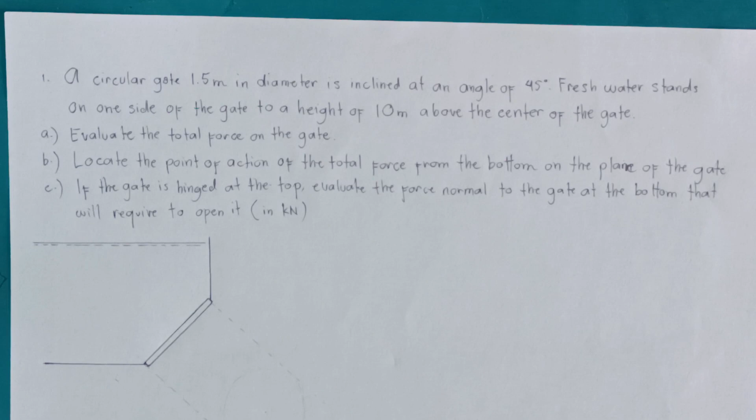Our topic now is about hydraulics, focusing on hydrostatic forces. The sample problem: a circular gate 1.5 meters in diameter is inclined at an angle of 45 degrees. Fresh water stands on one side of the gate to a height of 10 meters above the center of the gate. Letter A, evaluate the total force on the gate. B, locate the point of action of the total force from the bottom of the gate on the plane of the gate. C, if the gate is hinged at the top, evaluate the force normal to the gate at the bottom that will be required to open it.

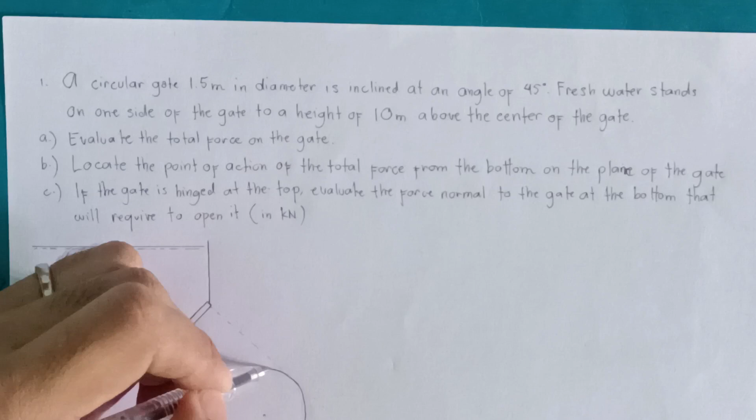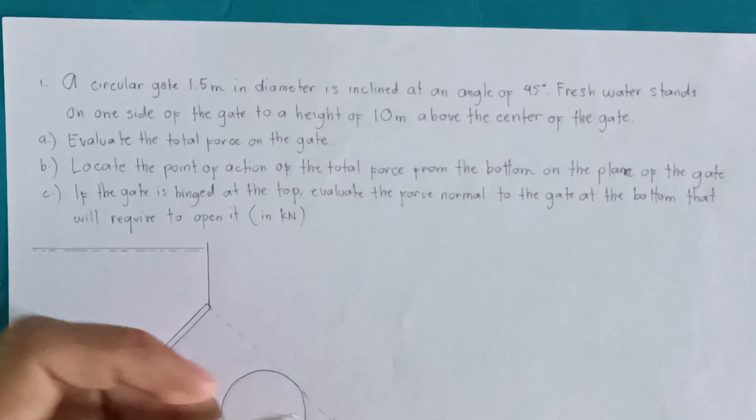It's 1.5 meters. Then it's given that this is the 45 degree angle. Fresh water stands on one side of the gate to a height of 10 meters above the center of the gate. So the center of the gate is here.

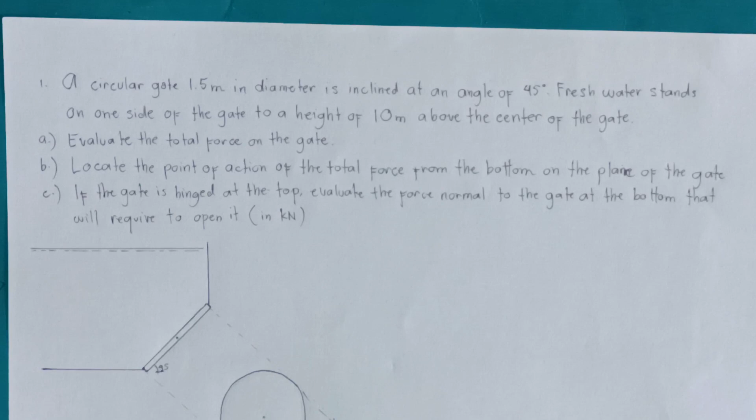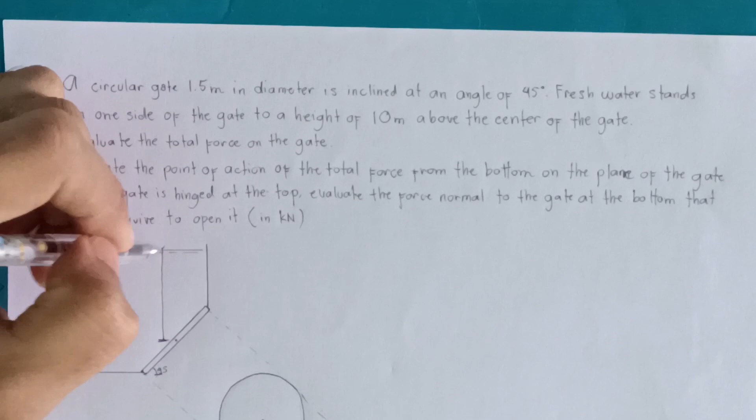Fresh water stands on one side of the gate to a height, meaning from the center to the liquid surface. So this is it, which is 10 meters. This is our 10 meters, our H bar. So that's all the given information.

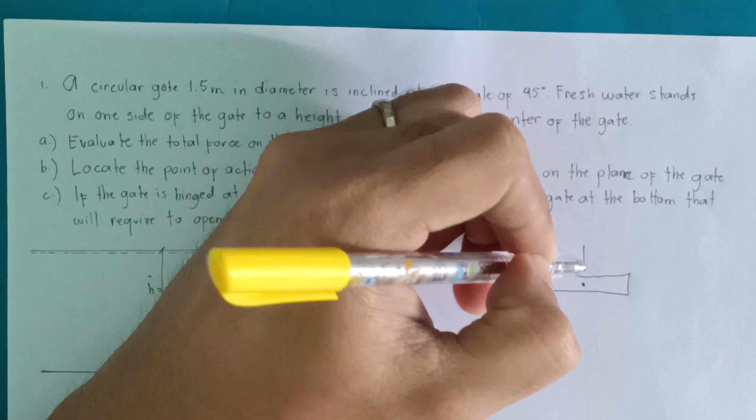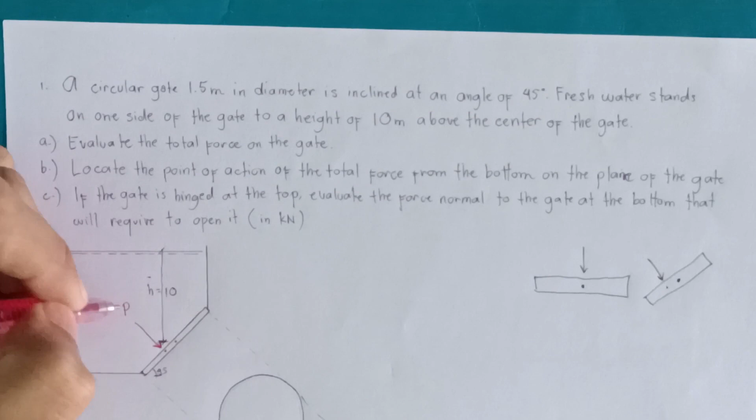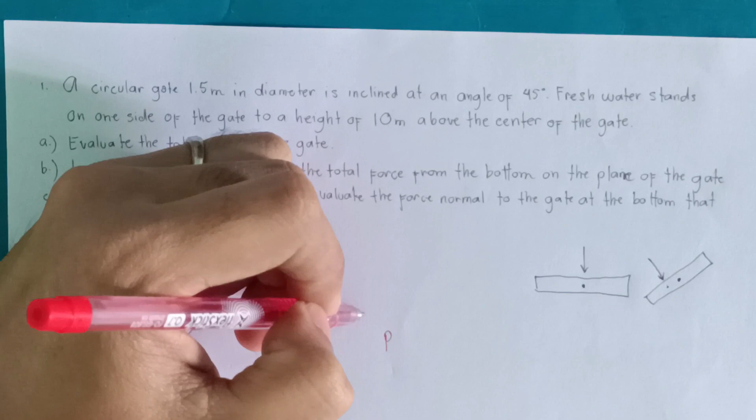Then what's our formula? Total force, what is that? P, our equation number 1, is equals to gamma times H bar times area.

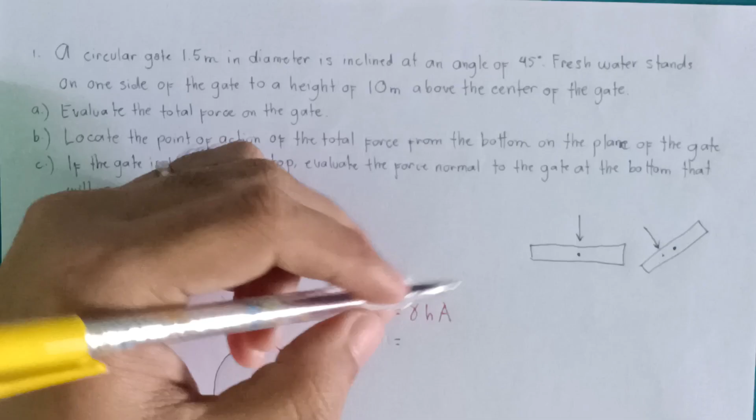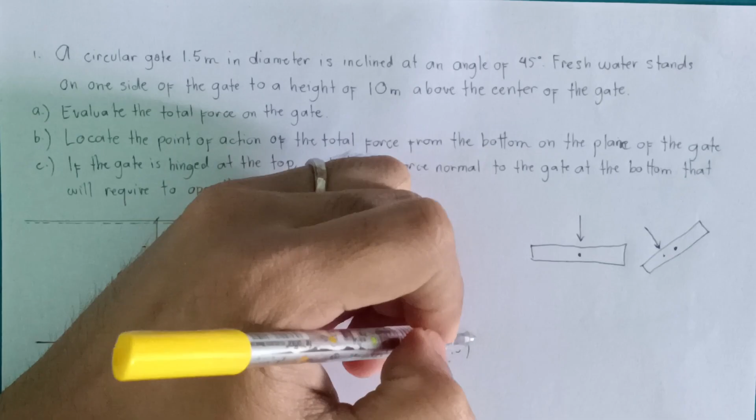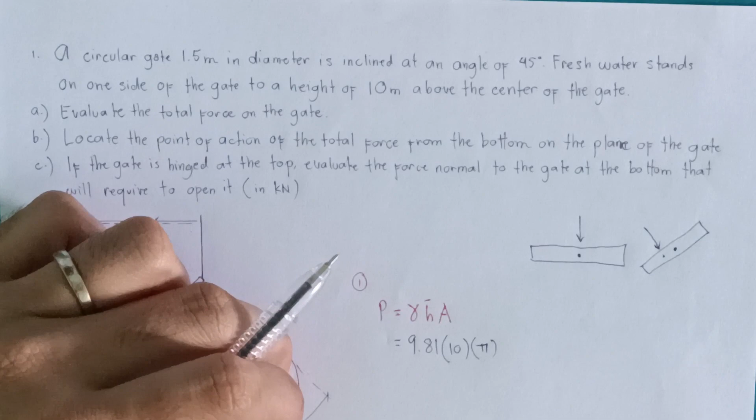Gamma is not given, but we already know that for water it's 9.81. Then our H bar is 10. Then for area, since it's circular, it's pi over 4 r squared — well, pi over 4 is actually just for the centroidal part.

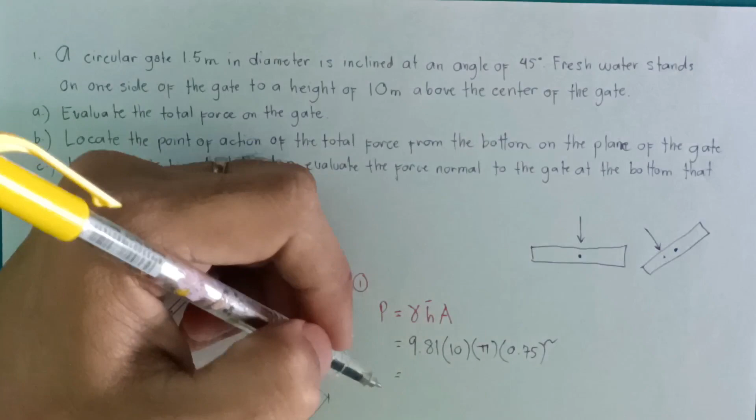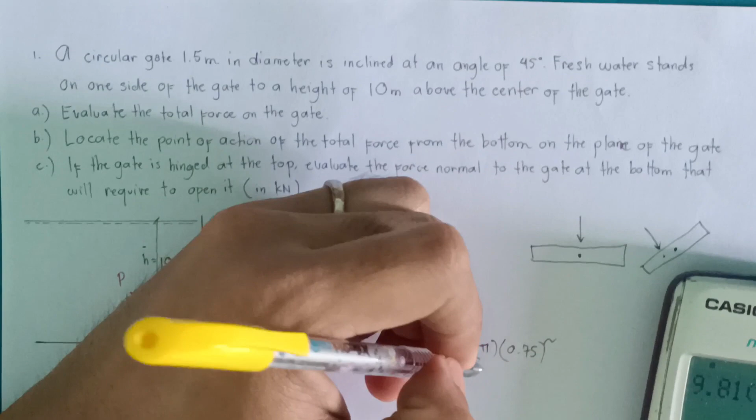So later we'll have that kind of formula, but here it's just pi r squared. Our r, our radius, is half of 1.5, which is 0.75, squared. Check it too. So 9.81 times 10 times pi times 0.75 squared gives us 173.36. So that's our answer, our force P.

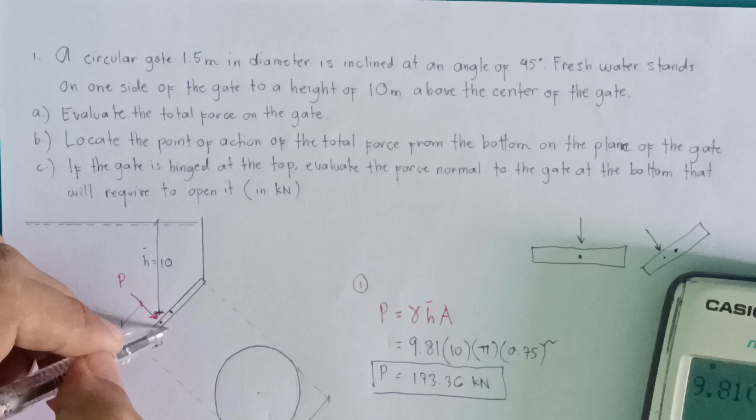That was just substitution. Letter B: locate the point of action of the total force from the bottom on the plane of the gate. So we need to find the location of force P from the bottom of the gate. How do we do that? Here's our radius, here's our center, and here's our center of pressure. So there will be a distance there, an eccentricity.

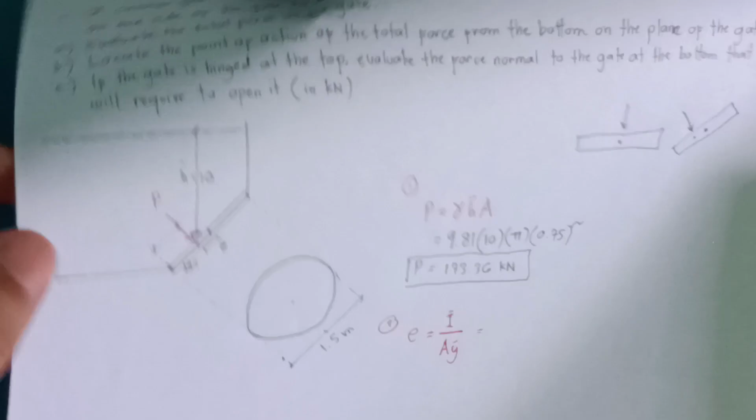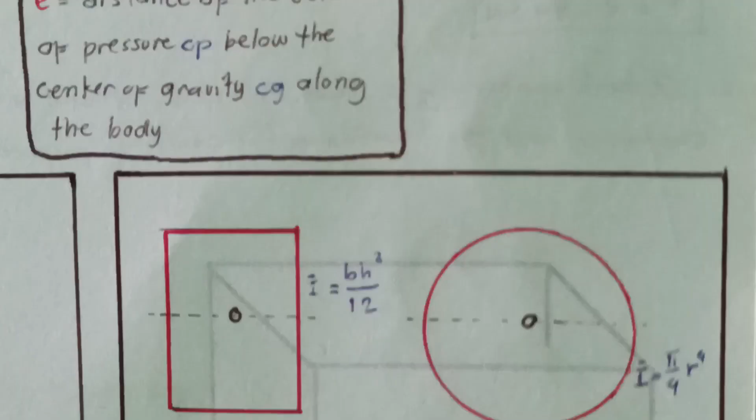So, for rectangular, we use BH cubed over 12. But since our given is circular, we use pi over 4r raised to the 4th power.

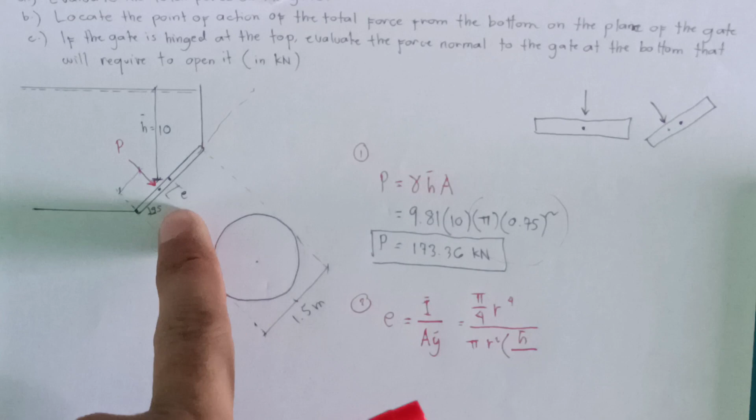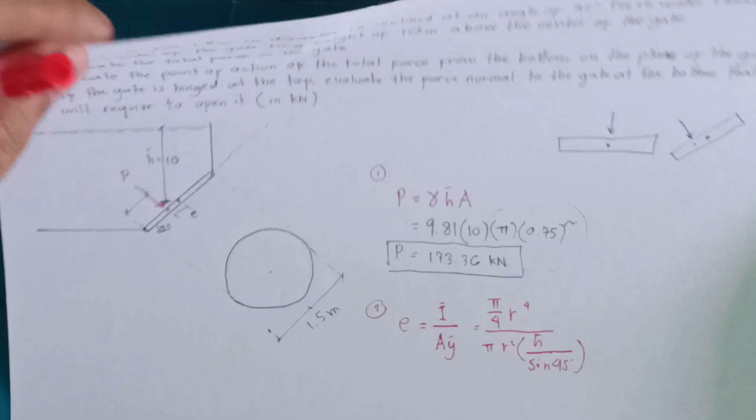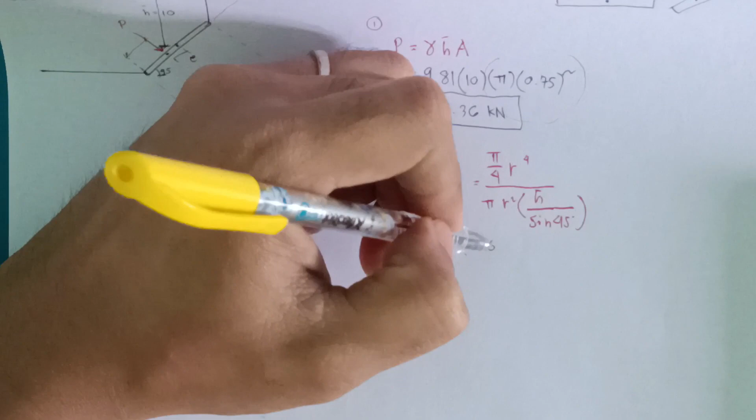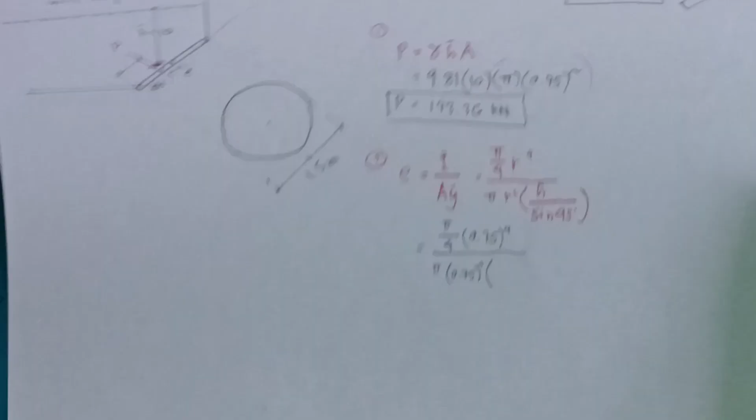So just substitute that. So we have pi over 4r to the power of 0.75 to the 4th, over pi 0.75 squared times h, which is 10 over sine 45.

So if we solve that, we have pi over 4, 0.75 raised to 4, then pi 0.75 squared times 10 over sine 45.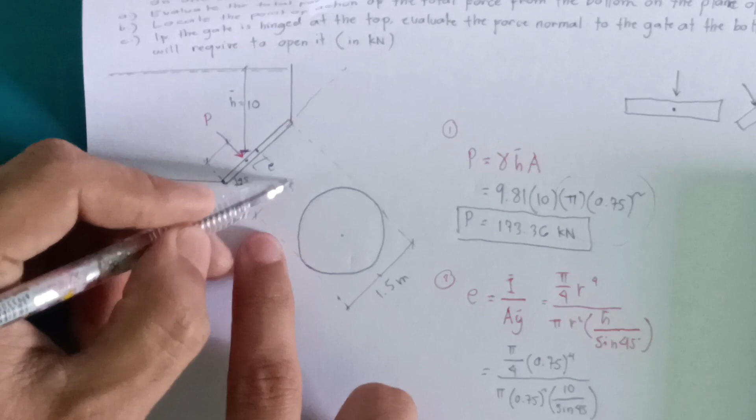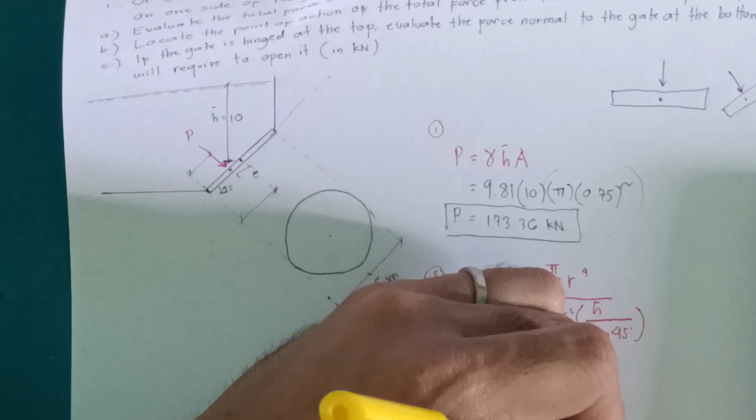So what we get is 0.75 minus 0.01, equals 0.74. So that's the answer. 0.74 meter. So that's our answer.

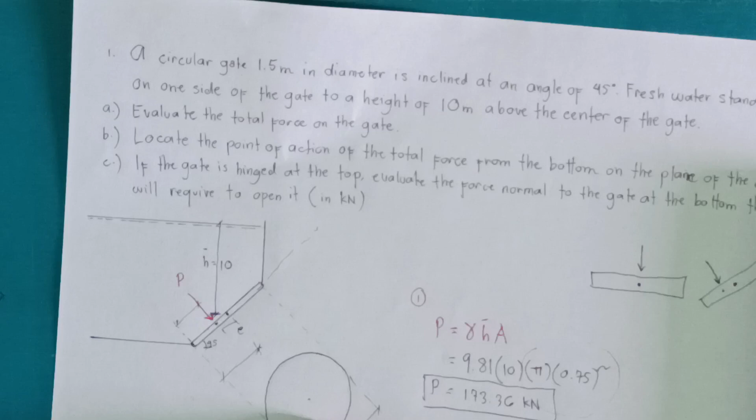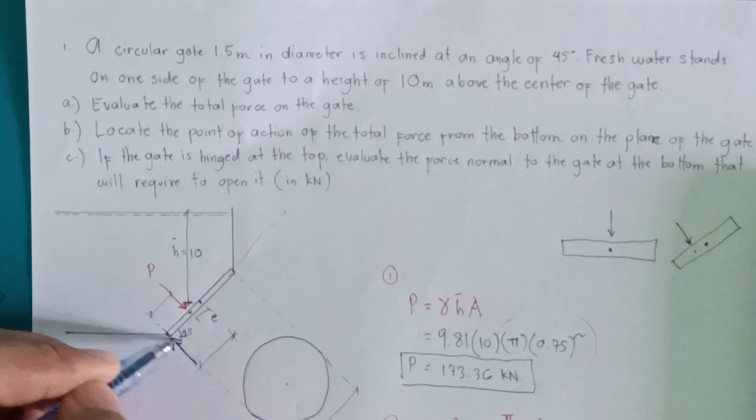If the gate is hinged at the top, evaluate the force normal to the gate at the bottom required to open it. So where can we find that? So here it is, normal to the gate. Here it is. That's our F.

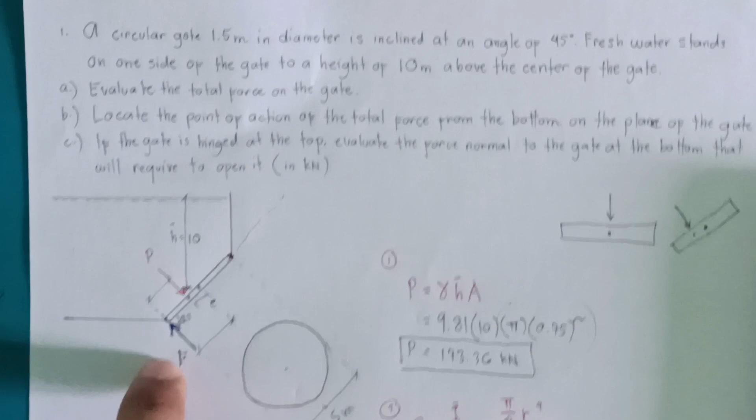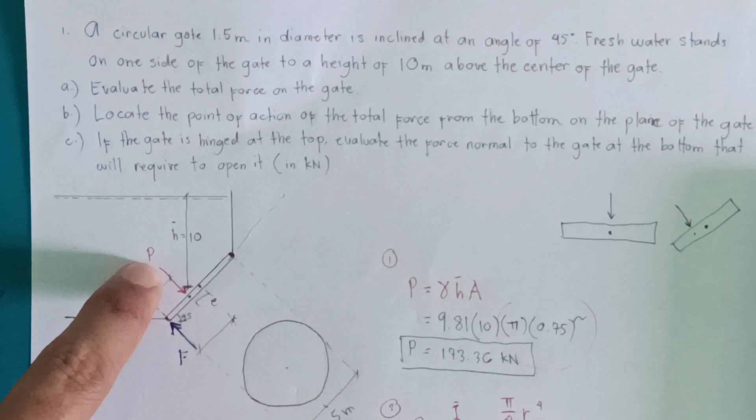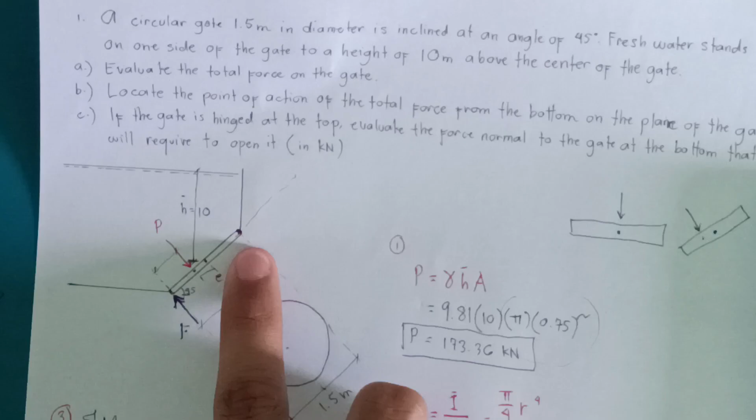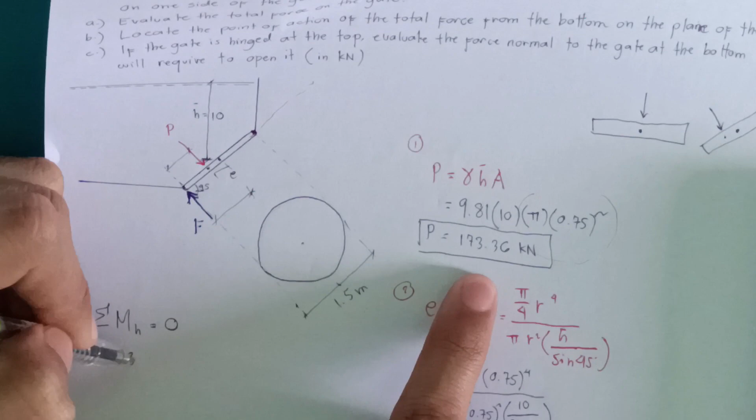So summation of moment at the hinge. So here we are at the hinge. So let's just M h equal to 0. So our P equals 173.36, then the distance is this, 0.75, half plus the E we solved.

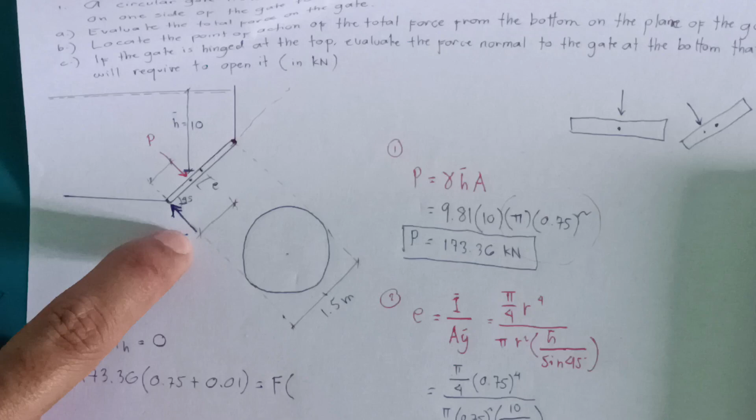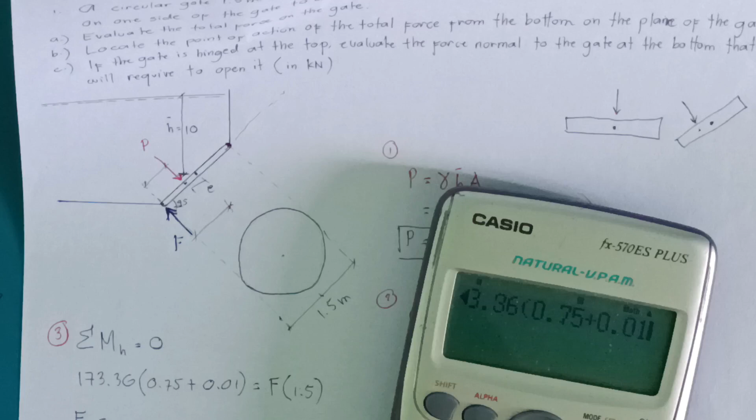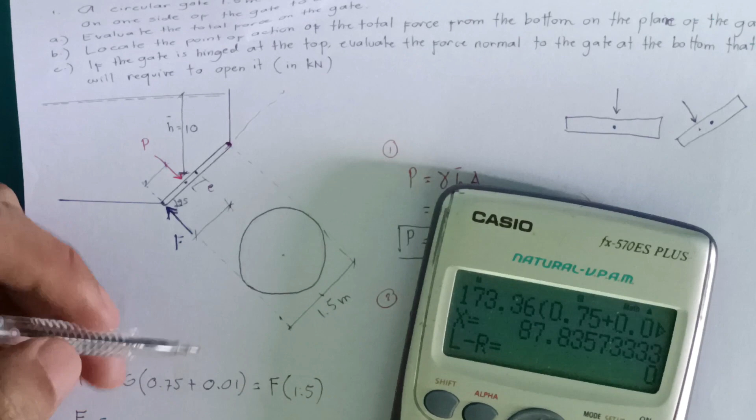So if you compute that, 173.36 times distance of 0.75 plus 0.01 equals F times 1.5. So if you solve that, we get 87.84 kilonewton. So that's our answer.